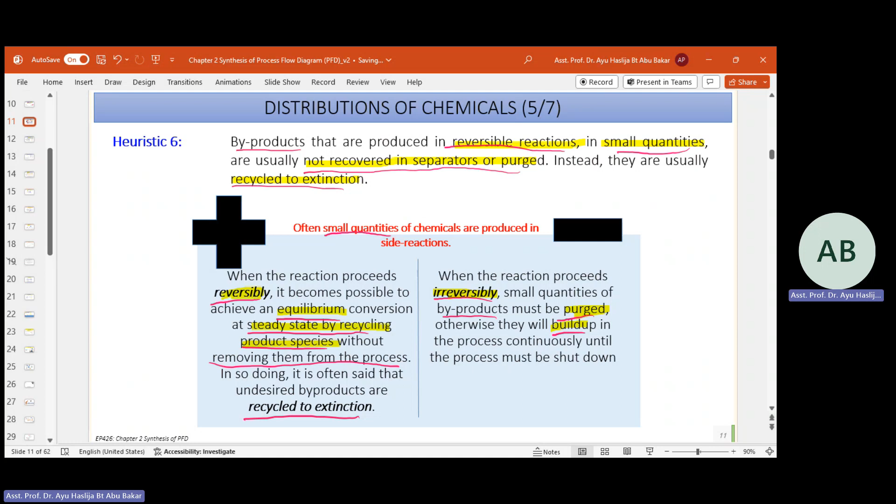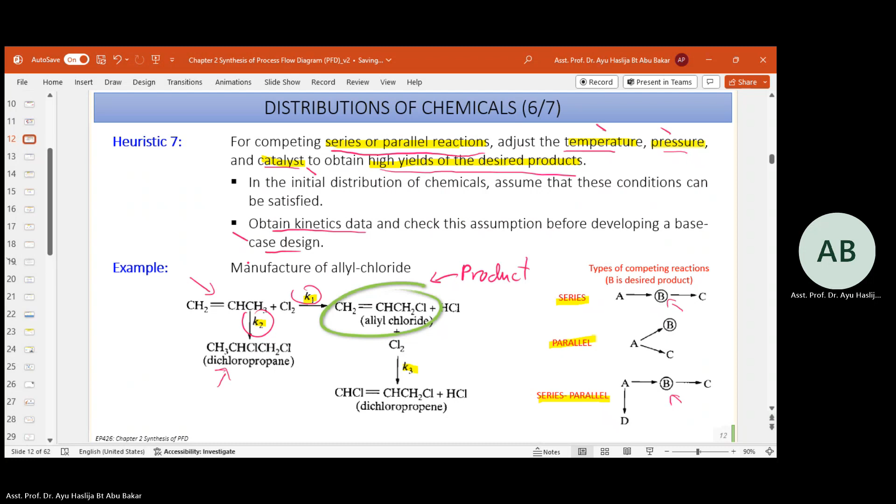Now here is the information that you require for the reaction. You see over here the constants. Reactions 1, 2, 3. This is your main product. K1, reaction 1. Reaction 1, reaction 2, reaction 3. In order to proceed directly to your product, these are the values that you require: reaction 1, the K value, and then the temperature, pressure, and different kinds of data.

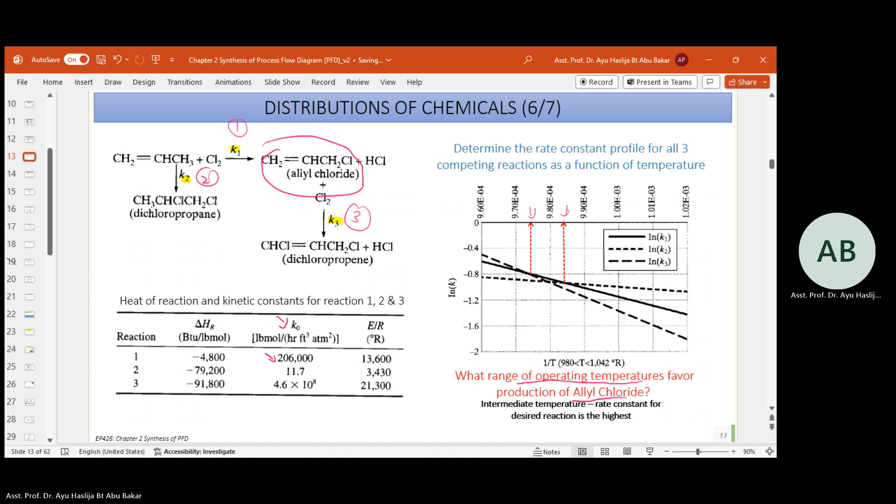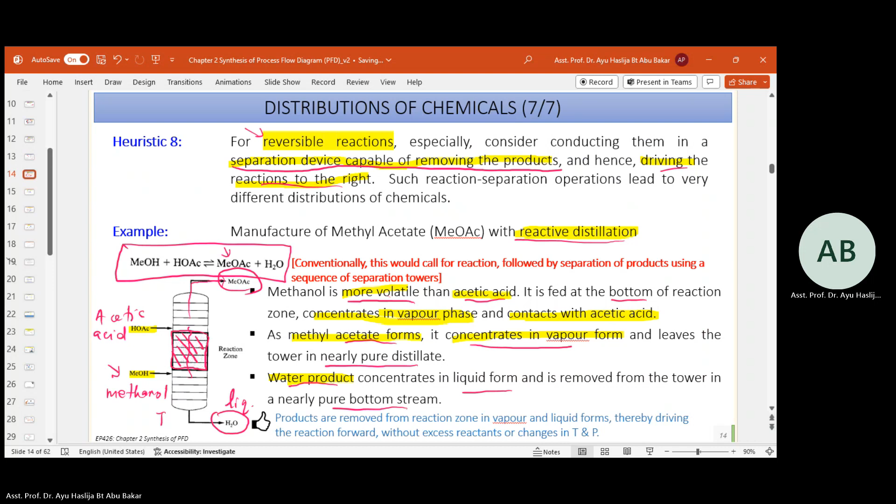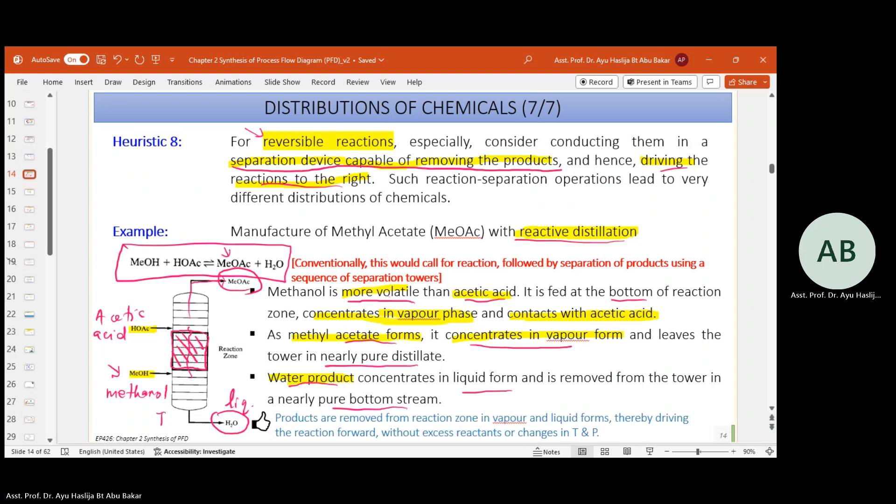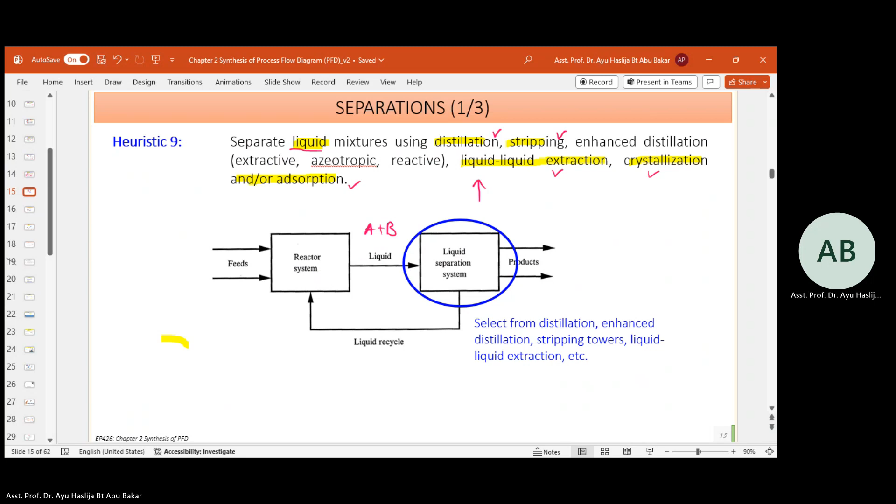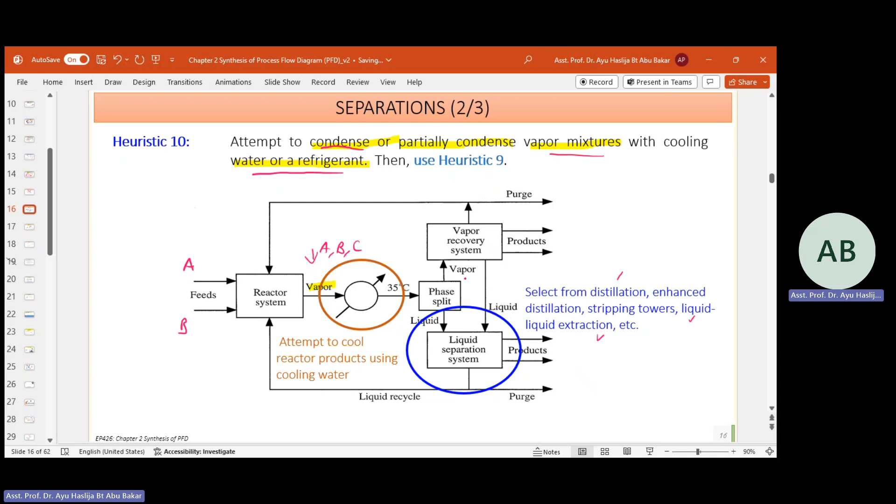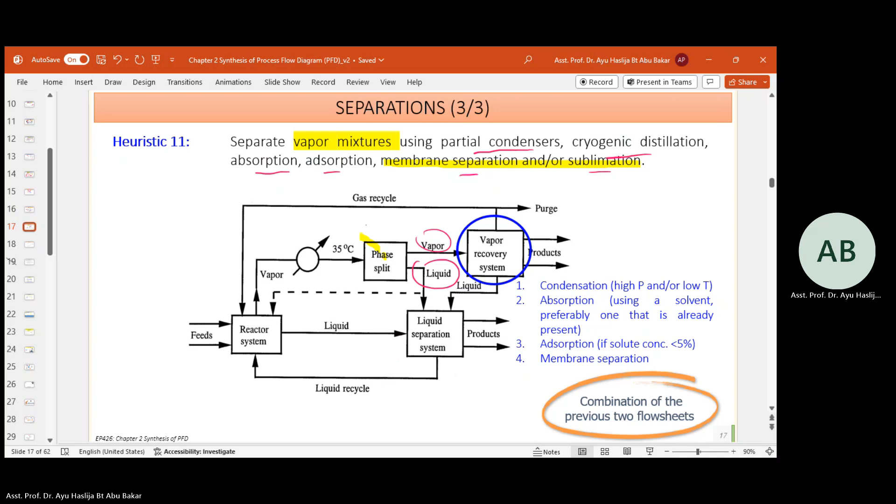Okay. Any question on the separation? Clear? Now, this is the summary of the separation heuristics: if the product stream is liquid, when it is vapor, and vapor-liquid.

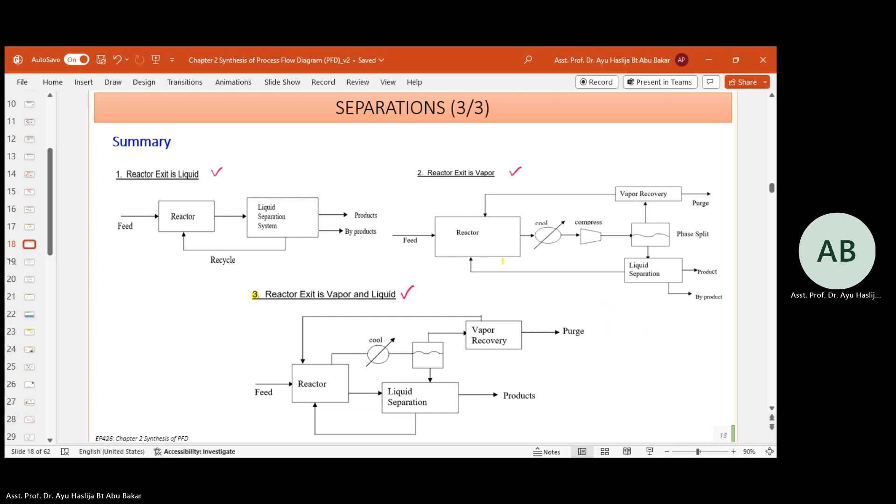Now I move this slide because it's all summarized in slides 20 and 21. Okay, now heat transfer. We move to heat transfer. Heat transfer has two categories, exothermic and endothermic. Okay, what should you do when you have a highly exothermic reaction? When you have a highly exothermic heat of reaction, consider the use of excess of reactant.

Okay. One, excess of reactant, inert diluent, or cold shots. And/or, which one method to implement in your process plant. Okay. Now, excess of reactant we had done previously on the raw material, where it also applies when you have feed with toxic and hazardous material, so that it completely reacts with the toxic and hazardous material. So apart from that function, it can also absorb the heat of reaction.

Okay, excess of reactant. Then inert diluent, again, supply inert to control the heat of reaction. Okay, and also cold shot. Cold shot over here, you cannot simply reduce straight away from high temperature to very low temperature. Okay, you must do it in steps. You see they are separated into a few steps. Cold shot, separated into a few phases until you get your targeted temperature.

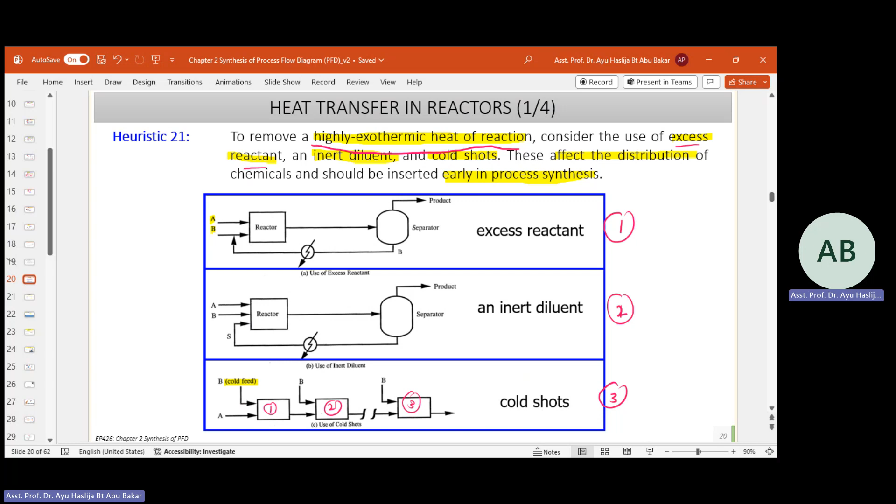Now for less exothermic, you can circulate the reactor fluid to an external cooler or use a jacketed vessel or cooling coils. Okay, less exothermic, so you can opt for less cost of controlling the heat. And you can also consider the use of intercoolers between adiabatic reaction stages. Okay, intercoolers.

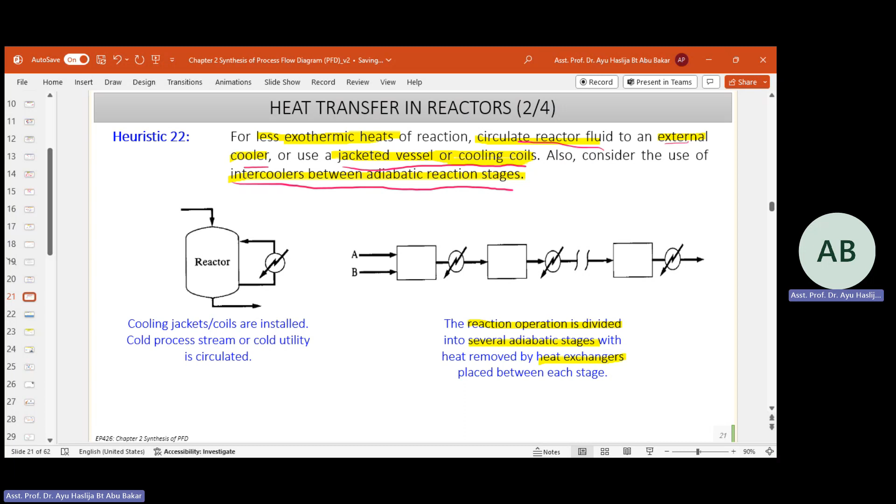Now for endothermic, similar concept, but endothermic, high temperature or low temperature? Endo. If highly exothermic, it releases heat, right? High temperature. Highly endothermic absorbs heat. How about the temperature? Low temperature. Yes, low temperature. Okay, so to control temperature for highly endothermic heat of reaction, meaning that the temperature is very low,

consider again the use of reactants. Similar practice. Excess of reactant, inert diluent, and hot shots. Now hot shots to control the temperature. What happens if you don't control the highly endothermic reaction?

What is possible to occur if you don't control the temperature? It goes too low, the reaction stops. Sure. Possible. Other than that, yes, cryogenic. If it freezes, perhaps you can freeze the unit op. You can freeze the nearby unit op, perhaps. This affects the distribution of the chemicals. So your feed may freeze as well. Then it can stop the reaction once your feed freezes. Okay.

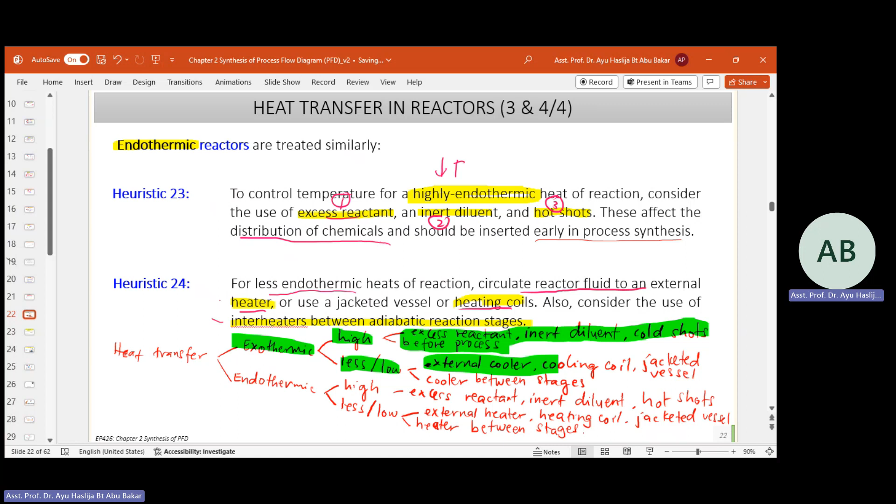Categorized into endothermic and exothermic. When you have exothermic, the heat will go high, or less or low. So what happens when you have high? Again, excess reactant, inert diluent, cold shots before the process. If you have less or low, external cooler, cooling coil, jacketed, and cooler between stages. Okay, if you have endo, similar for high. Excess reactant, inert diluent, and hot shots. Less and low, heater.

Come again? Case by case. If you need all those three to control the temperature, yes, you can do that. It depends. If required. But usually you will see which one is more feasible, because all of them involve cost. If either two or one can control the temperature and the reaction, then just proceed with those.

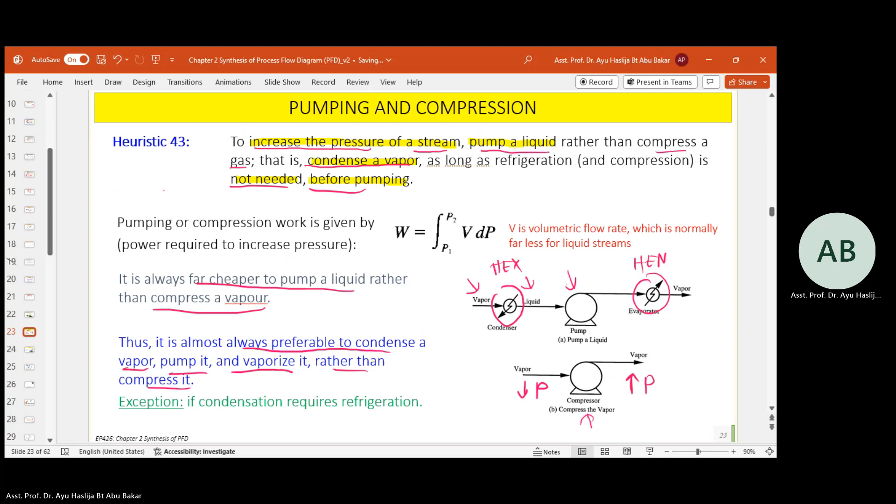In PDP, students sometimes use a pump to increase the pressure of a vapor stream. So you must use the correct instrument to increase the pressure of your stream. Check the phase of your stream. Liquid, use a pump. Gas, use a compressor. That's the fundamental. Cannot.

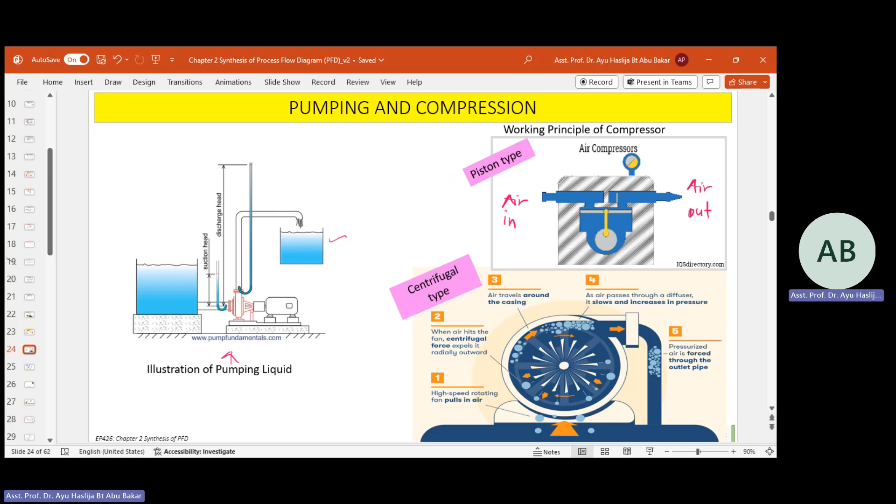This is the summary of the heuristics. We have 5 categories: the raw chemicals, the chemical reactions, distribution of the chemicals, the input and output, the recycle system, the separation. Then the heat transfer, exo or endo, whether you need cold shots or hot shots. Then the last part is the pump and compressor.

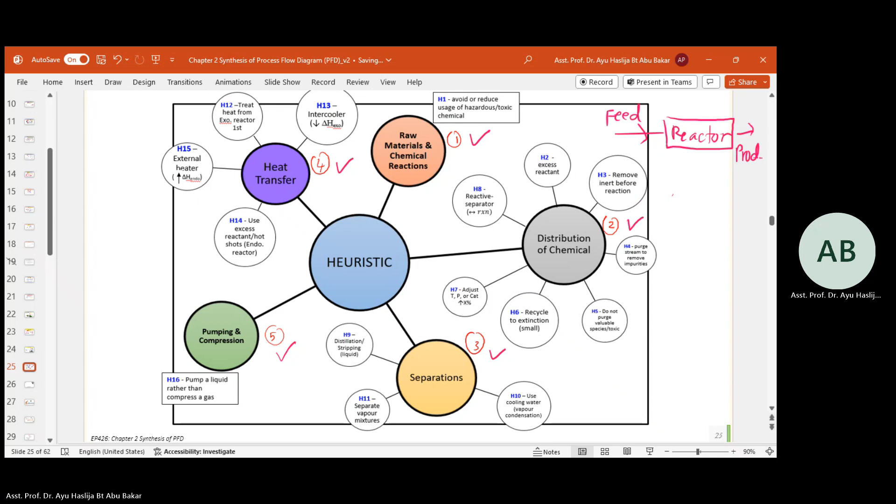These two, 1 and 2, basically involve your reactor, the feed for your reactor. Wait, I'll draw it. What I can conclude is number 1 and number 2, the raw materials and chemical reactions, basically involve your reactor: the feed and the product. The feed depends on your raw materials. Inside the reactor, the reaction occurs. How is the reaction? So both 1 and 2 refer to the first part of a process, involving the reactor and reaction.

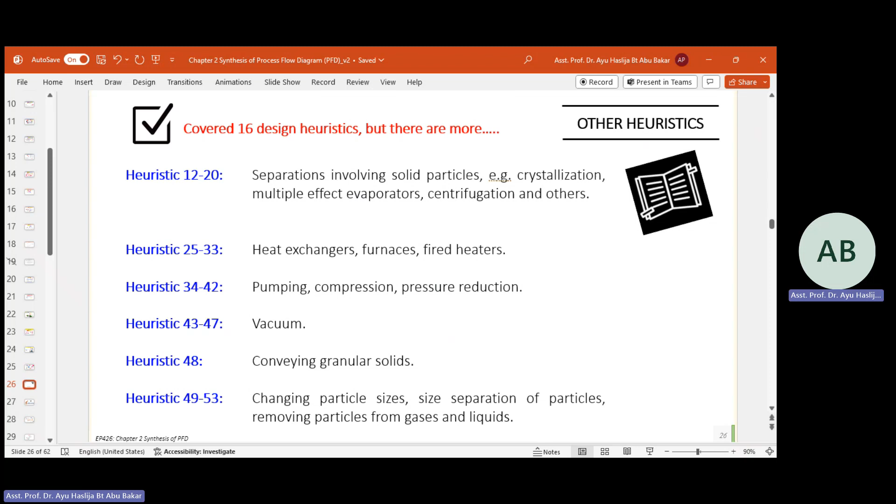After you get your product, then you need to think of how to distribute, to separate it. After you finalize all those things, only then does step 5 come in, task integration: you connect each of the unit operations into one complete link. Any questions so far? Those are the important heuristics you should focus on. There are many more heuristics, but those are the most important ones, the ones we discussed.

Okay. Can. Now we move to steps in designing a chemical process. Do you want a 5 minute break? Okay, we take 5. Those who haven't captured the attendance, snap.

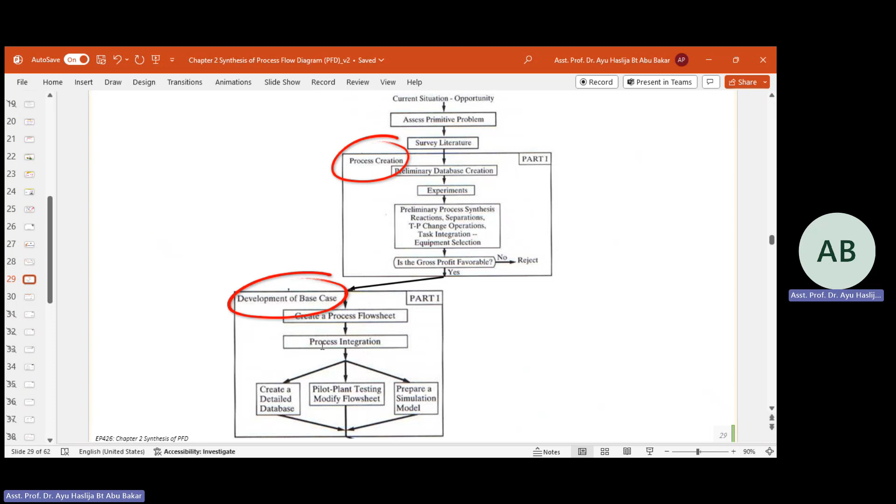Now, we are done with the heuristics. We move forward into steps in designing the chemical process. Okay, I will use an example of the VCM. This one you can read through all the recall slides. Okay, I will skip to here. This one, as discussed earlier, these are the process synthesis. Process synthesis, the 5 steps. Last one, after the heuristics, the heat exchanger, everything, and the pump and compressor, then only integrate everything into one PFD.

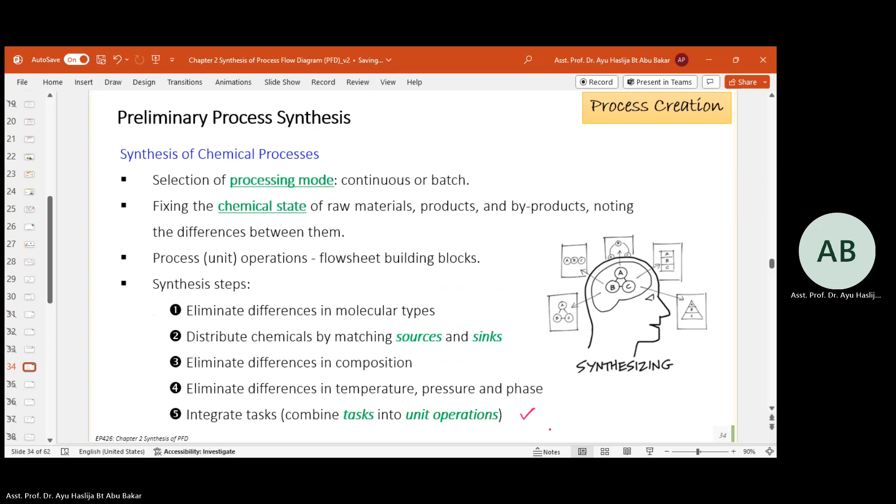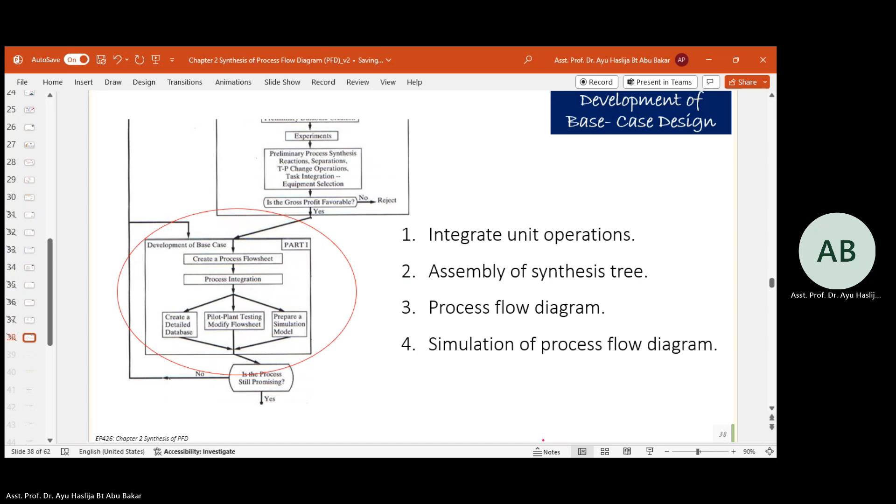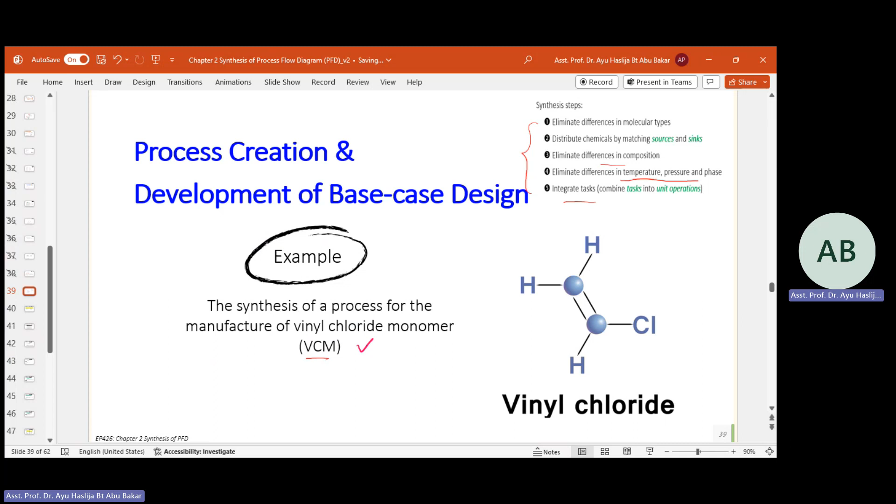This one is a repetition from the previous part. Okay, I'll skip to this. Process creation and development of base case design. So we will use the example of VCM. Again, the VCM, the one that we discussed, the alternative synthesis last time. Now we go one by one, the steps.

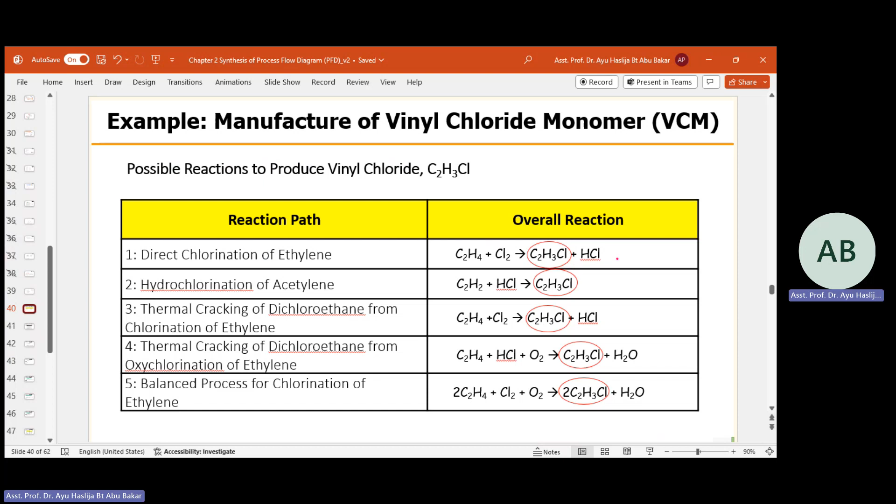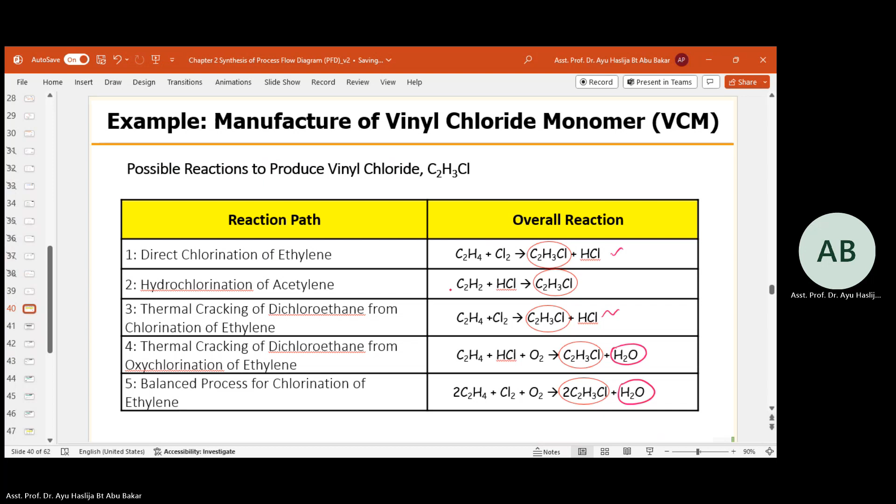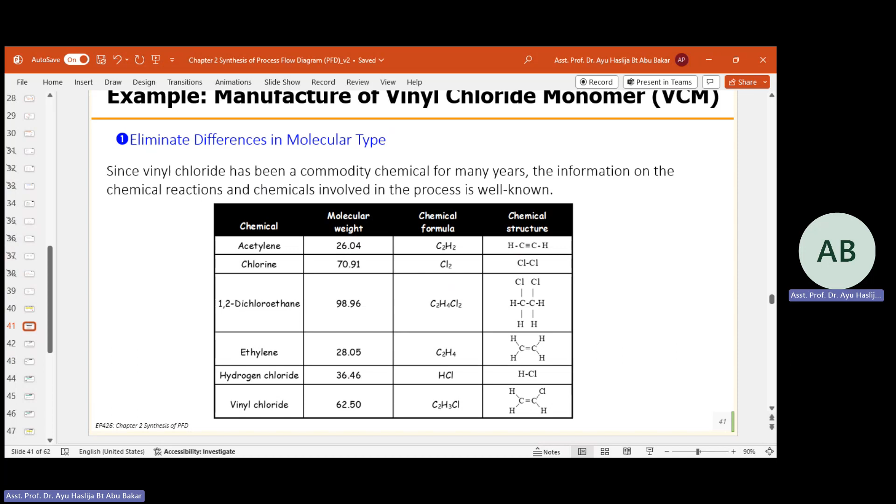Now the first step is to eliminate the differences in the molecular type. From the 5 alternative pathways, you should compare the properties. Here you see this is your main product, the VCM. In some of the reactions, you have byproducts, which are HCl and water. Your feed, you either need C2H4 or C2H2. So you should compare all of these properties, list them down in a table. Finalize the properties, like the molecular weight. Why? Because that will be used in your reaction.

Okay, we go one by one. Step 1, to eliminate differences. First, we compare the advantages and disadvantages for each pathway. Select this one, reaction 1. See what the advantages are. It can occur spontaneously at a few hundred degrees C, meaning that the reaction rate is fast to get your product. The disadvantages: it does not give a high yield of VC without simultaneously producing large amounts of byproduct, expensive chlorine, and may produce byproducts which may not be sold easily.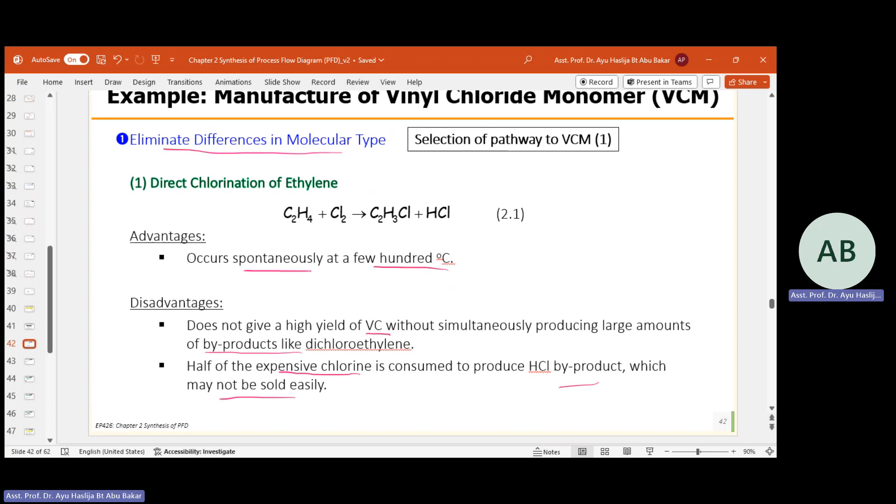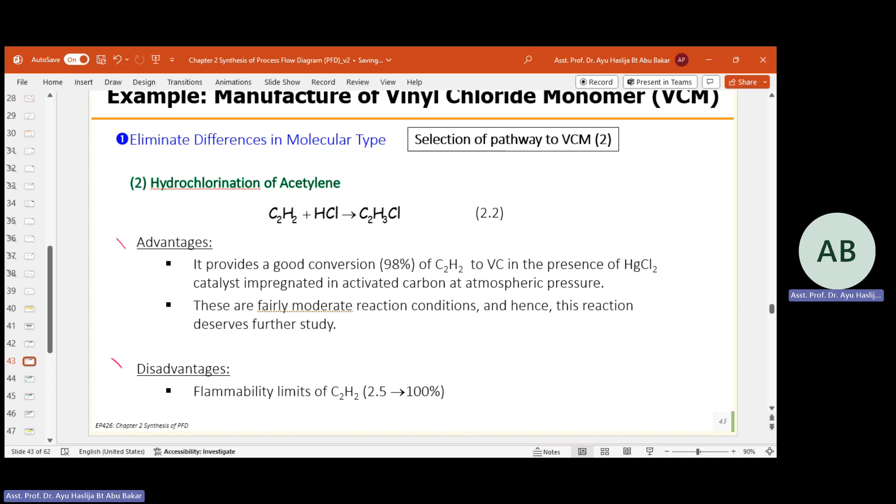So for each of the pathways, you must list down the advantages and disadvantages. In your PDP, I think it is better for you to put it in a table. Then you rate it. From there, you can see the ranking, which one to choose. Next pathway, which is hydrochlorination of acetylene. You list down again the advantages and disadvantages. Do the same for each pathway. Okay, that one is for step 1.

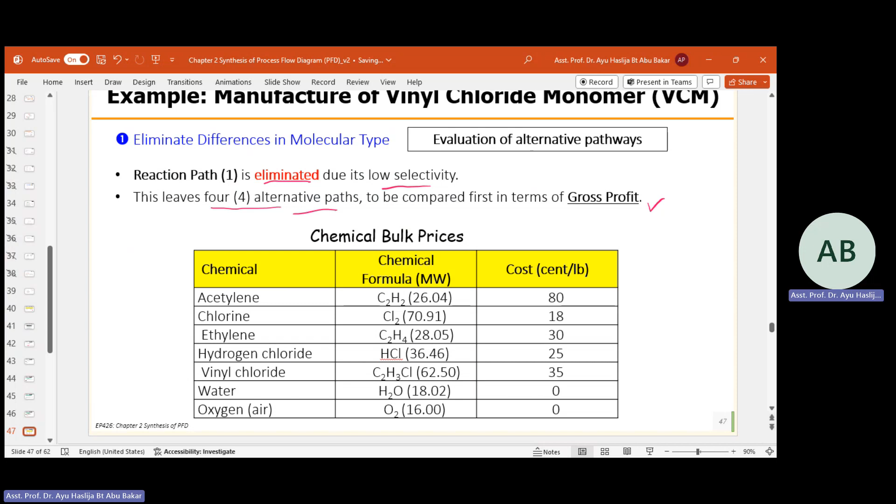Then you should compare the gross profit. This is only gross profit, not economic analysis yet. Gross profit here, you compare your product minus your reactant, minus your feed, whatever you need. The simplest analysis, gross profit. That's why the information just now, the chemical formula, everything, is important so that you can know the cost per kg or per ton. It depends on what basis you want to compare.

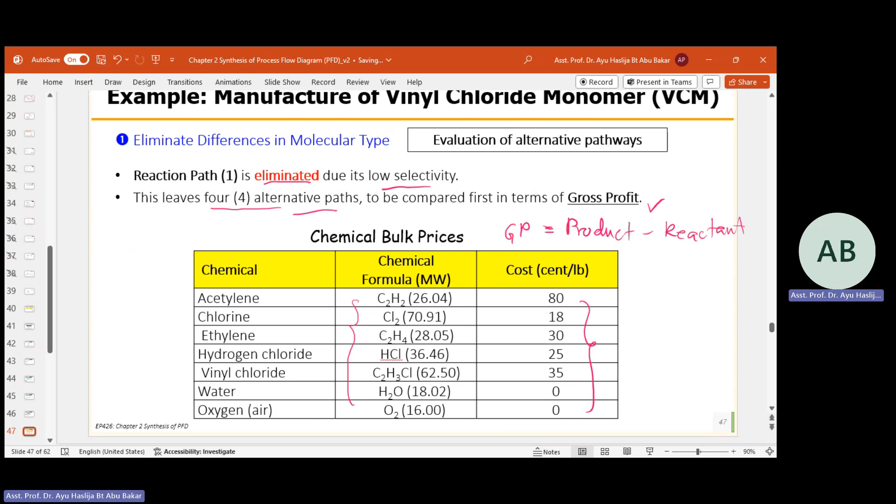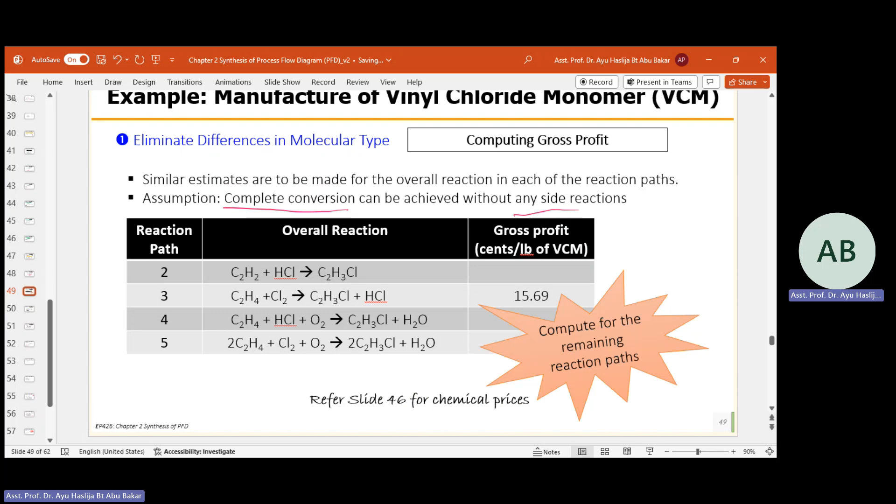Now here it considers reaction path number 3, this is the product and reactant. Compare the cost, product minus the reactant. You get positive, so roughly there is still profit. This one, path 3, has profit. Now again, estimate for the rest. Assumption: complete conversion, without any side reaction, just to roughly calculate the gross profit.

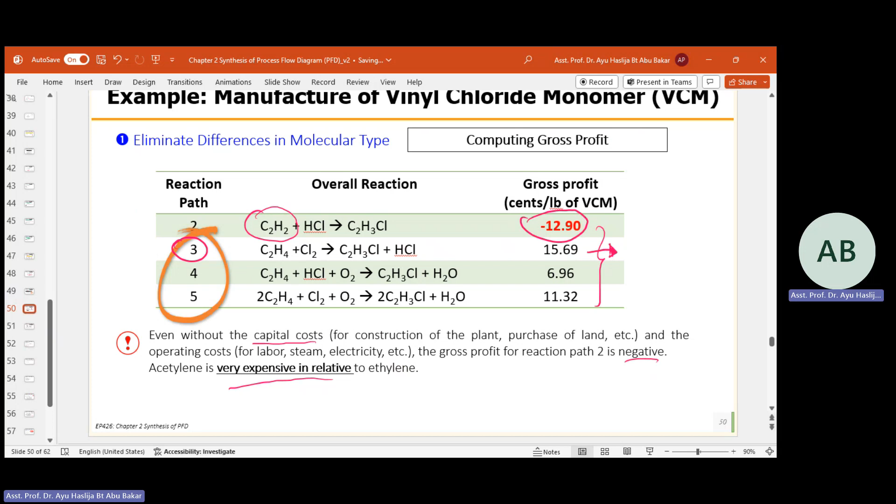Here it chose reaction 3 because from the gross profit comparison, it gives higher gross profit. Okay, so we will focus on reaction 3 because it gives higher gross profit. Now we proceed with reaction 3, then we check for the rest.

So for reaction 3, this is the feed, this is the product. Okay. Identify the feed and the product. So eliminate differences, still at the first stage. First step, identify what are the feed and the products, what is the targeted production. Okay.

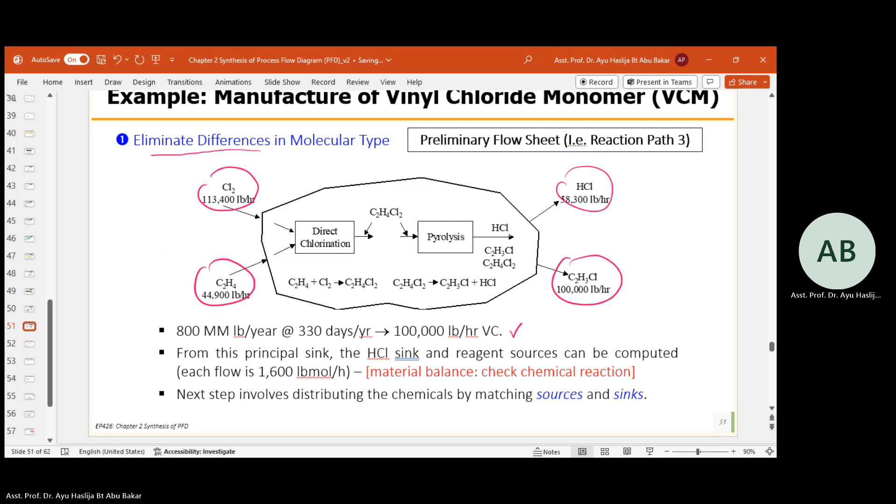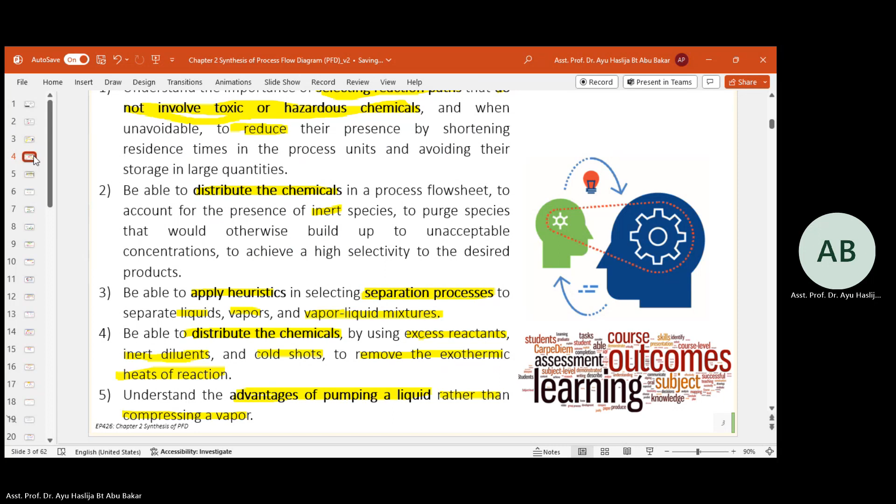Now from there, distribute the chemicals. Okay, wait, before we go to distribute. For eliminate differences, still remember what is the heuristic. Eliminate differences. Okay, we check back what are the heuristics. Here, raw materials and chemical reaction. Only one heuristic, which you should select the raw materials and chemical reaction to avoid and reduce all of this.

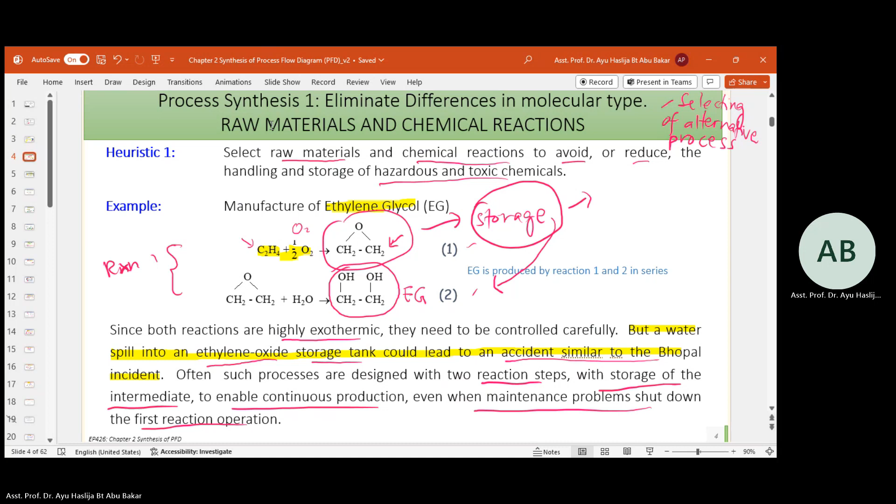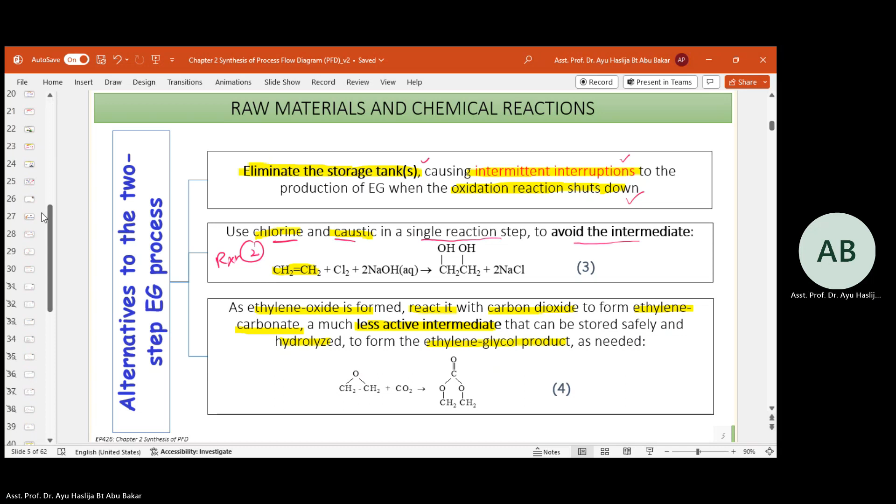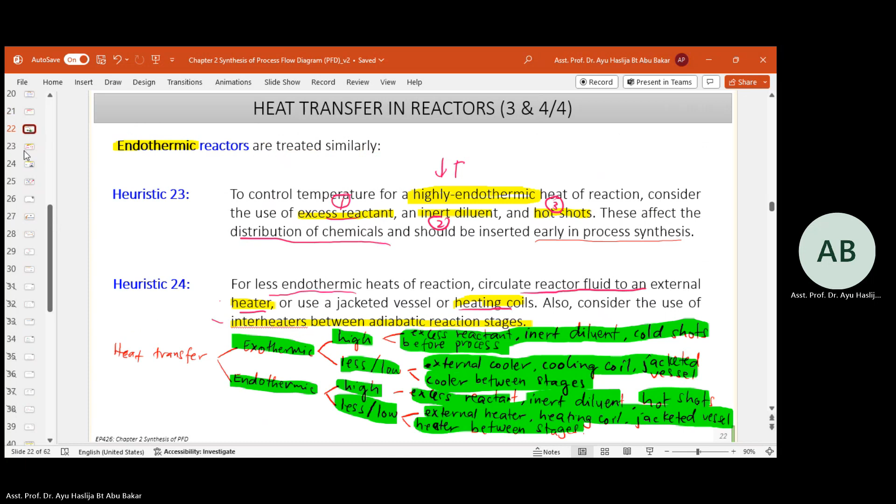Okay, so this one, we had done the comparison. Which one is better? For step 1, only one heuristic. Wait, I open the summary. Okay, this one. Heuristic. Step 1, only one heuristic. Then we move to step 2, distribution of the chemicals. So let's see whether it meets any of these heuristics. We can apply any of these heuristics. Okay.

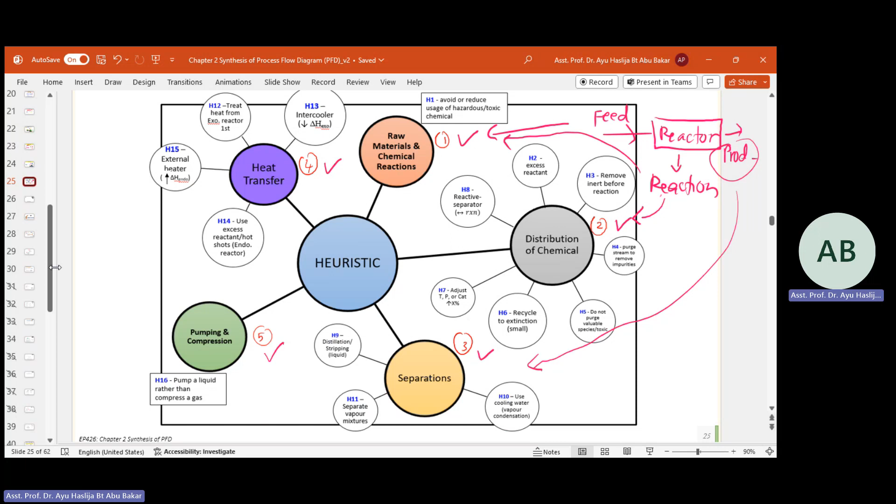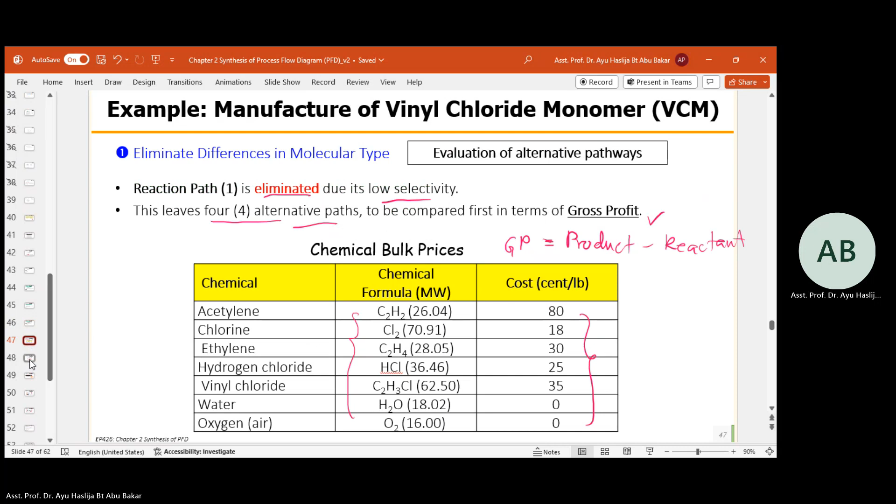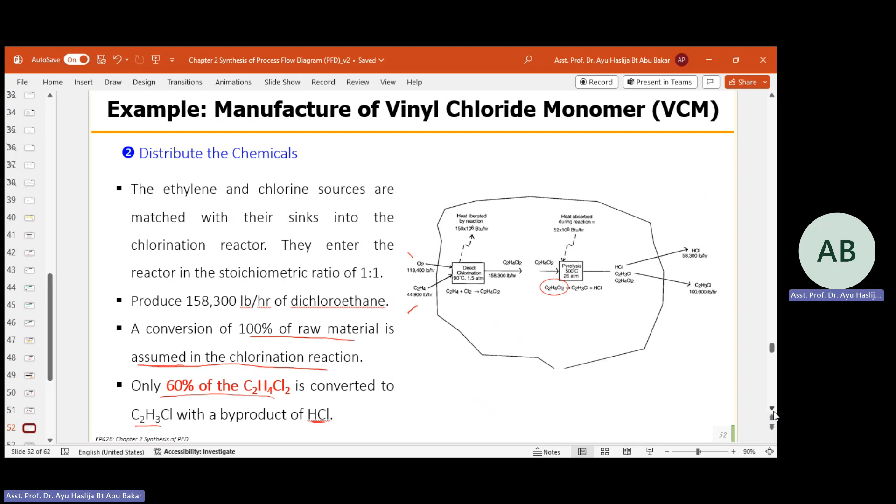Okay, now we go for distribute the chemicals. Few points need to be taken into consideration. We identify chlorine and ethylene as the feed. Okay, what is the production rate that you need to identify? What is the conversion? So at the moment, at the first stage, you assume 100% conversion. Okay, but after you simulate, only 60% of the C2H4Cl2 is converted.

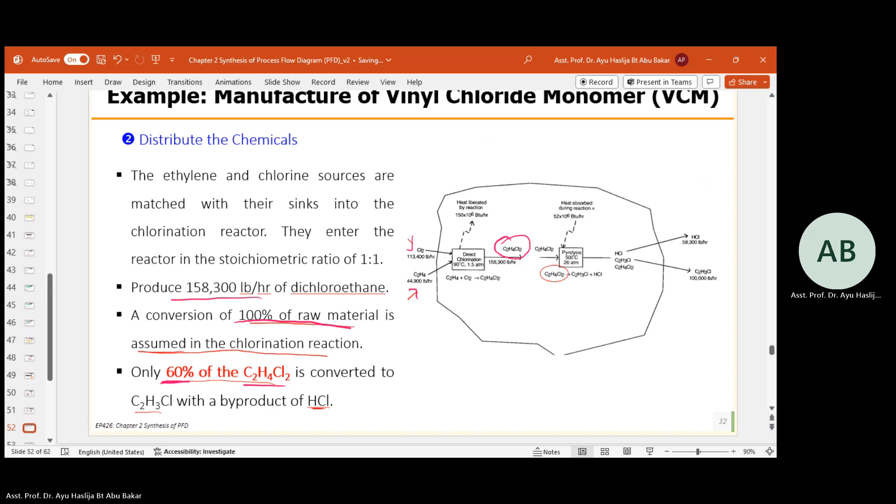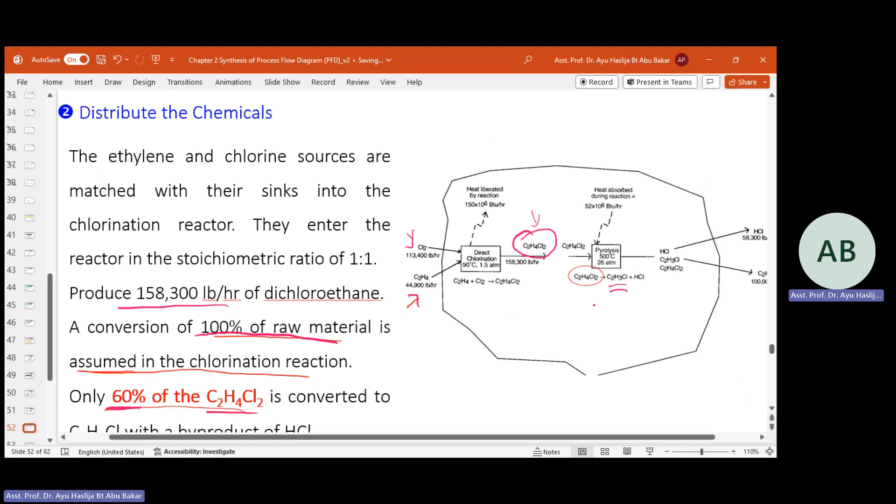Yeah, feed Cl2 reacts with ethene, enters the direct chlorination process, then you produce this. Okay, this is not yet your main product. Then it goes to pyrolysis to produce the VCM. Okay, so from there, you can try to calculate through material balance how much is your product. What is the conversion rate of your product from there?

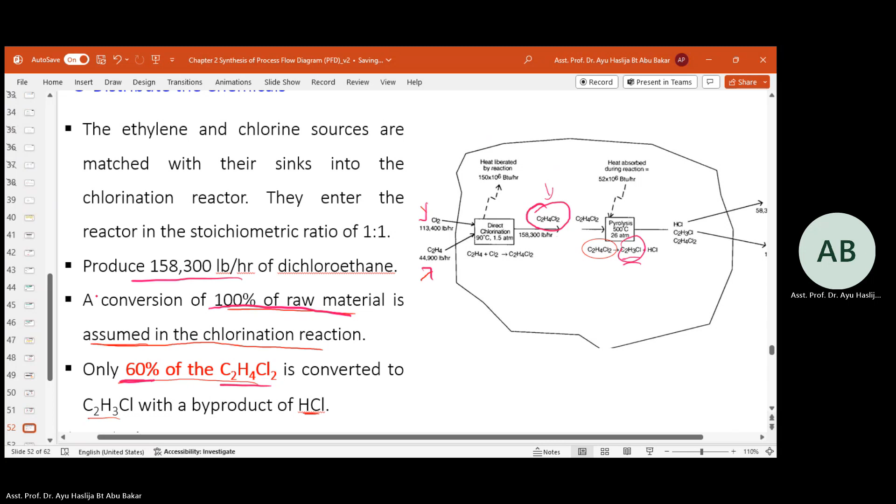Okay, from the material balance, then you should calculate your targeted production. How many tons per day or per year? Okay, you should calculate based on your material balance. Okay, step 2, you need to identify what are the reactions involved between these two stages and what happened, the material balance, how many percent of conversion, what are the yields. Okay, that's the one for step 2.

Now we move to step 3, eliminate differences in composition. So after your chlorination reaction, it is nearly pure and requires no purification. Okay, here after chlorination, nearly pure, you get C2H4Cl2, dichloroethane. Now this one is fed into the pyrolysis to produce your VCM. So after the chlorination process, it requires no purification.

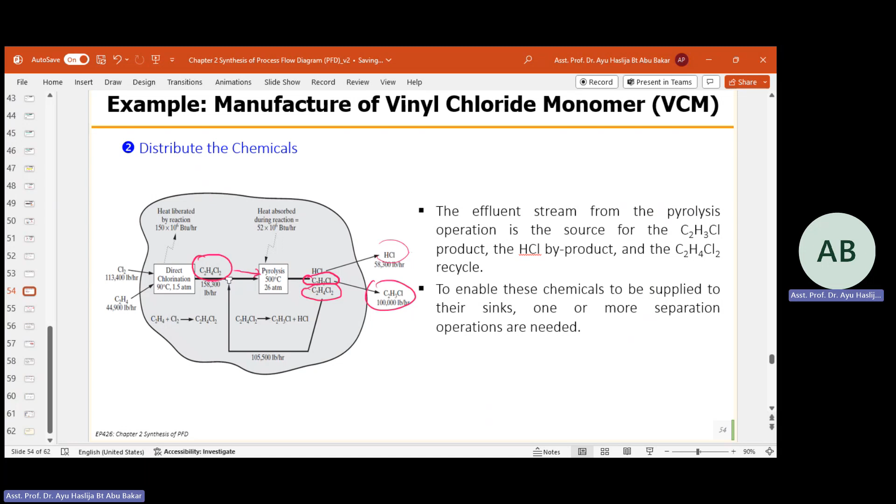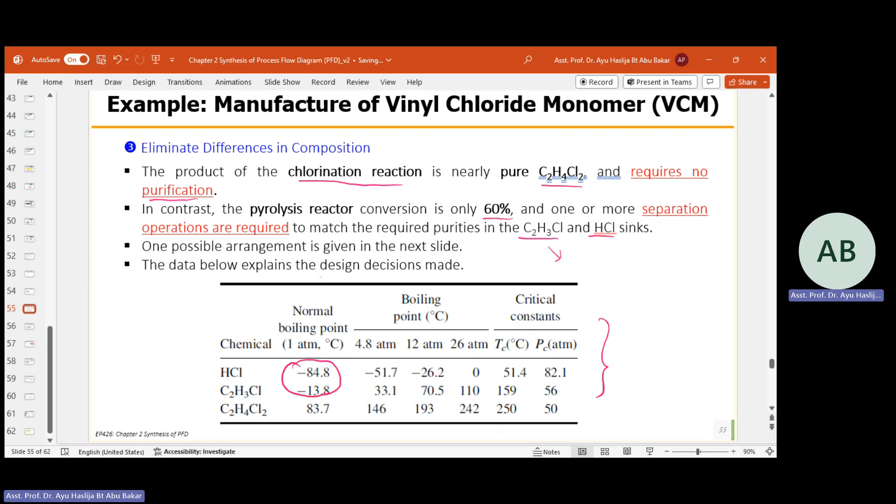Okay, then it's suggested distillation column. Two distillation columns to separate the VCM and the HCl. Remember that product from pyrolysis is in vapor form. So do you need to liquefy the vapor to enter the distillation column or not? You need to think. The feed to distillation, should it be liquid or can it be vapor? Liquid. Should be in liquid.

Then you should propose or look through the required instrument or unit op to install before the distillation column. Then from there, identify what type of distillation column can separate the HCl. Then the choice of distillation tower for the next one. What are the options that you have? Step 3 just now, eliminate differences, means the separation part. It involves the separation.

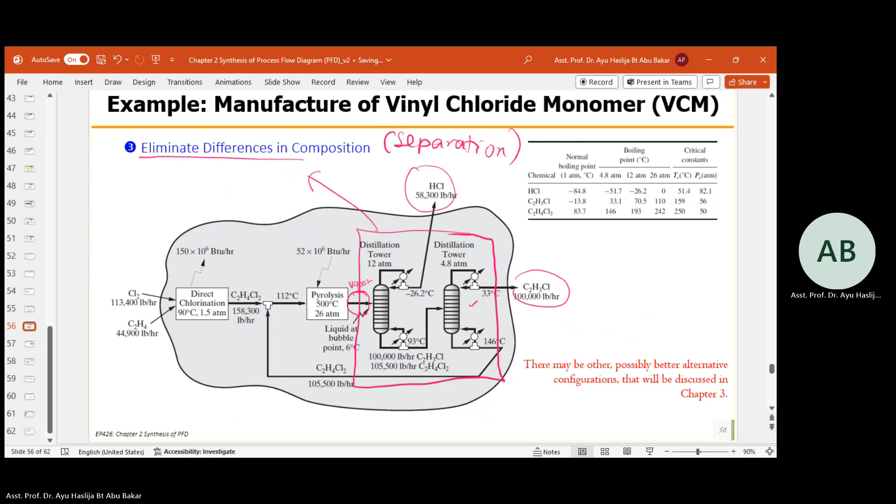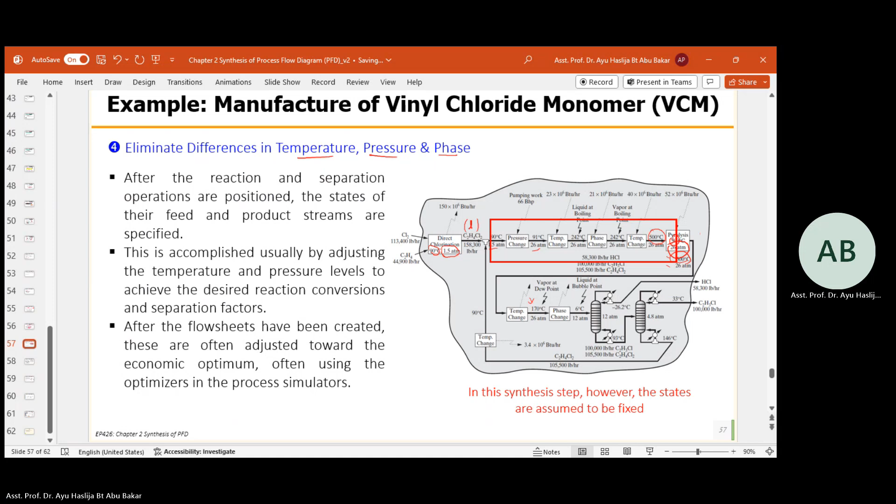Okay, step 4, which is to eliminate differences in temperature, pressure, and phase. Now you see the PFD becomes more complex, where you need to consider the temperature, pressure, and phase change. What are the units of instrument that you need to fulfill the requirement?

Okay, so the product stream over here, it mentioned 90 degrees. To enter the pyrolysis, you need up to 500 degrees C. So what do you need along the way before the pyrolysis?

Now here you see, after the pyrolysis, just now you mentioned in vapor form, right? So here now it identifies to change the temperature and phase. Okay, that is step 4: eliminate differences in temperature, pressure, and phase. Any stream that requires temperature change, pressure change, or phase change, you need to identify.

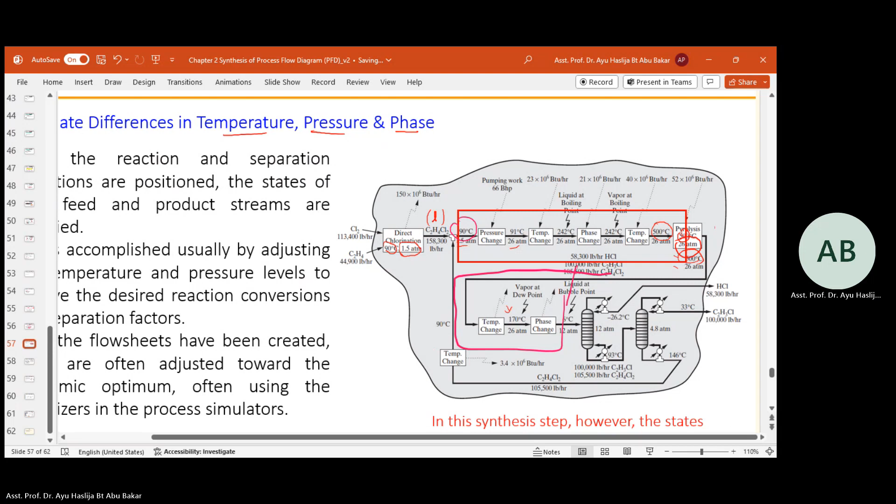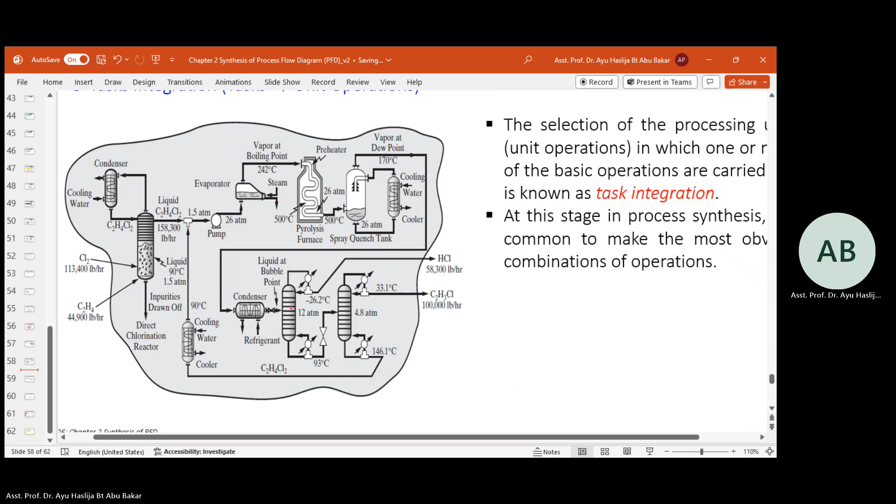Okay, so after you identify all the unit ops, the tasks, connect them all together in one process flow diagram. So from here, you can see the overall PFD. This is your input, this is the feed.

Okay, this is the feed product. This is your separation, step 3 just now. Okay, so this one, step 4, involves the evaporator, phase change, preheater.

This is your pyrolysis, one of the main units. Now, before entering the pyrolysis just now, you need to heat up the stream. So this is what you need.

After pyrolysis, the product stream, you need to change the phase. So this is what you need before it enters the distillation.

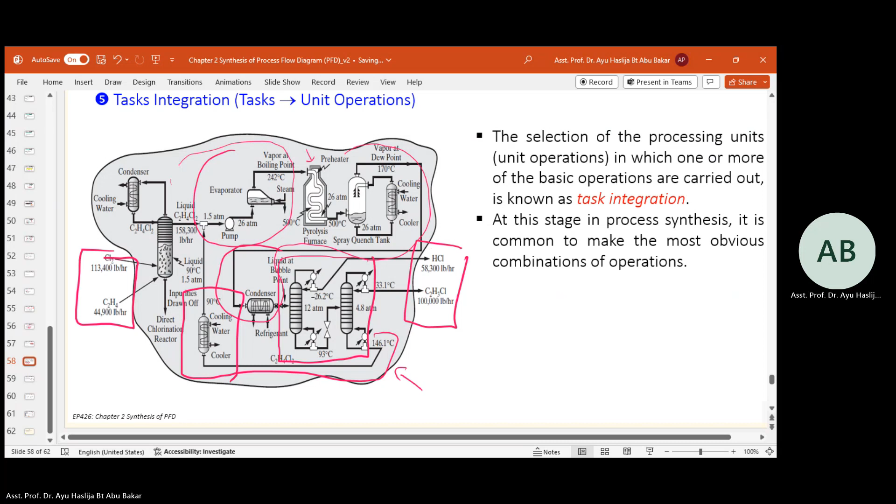Okay. Clear? Any question? This is the assembly of synthesis tree.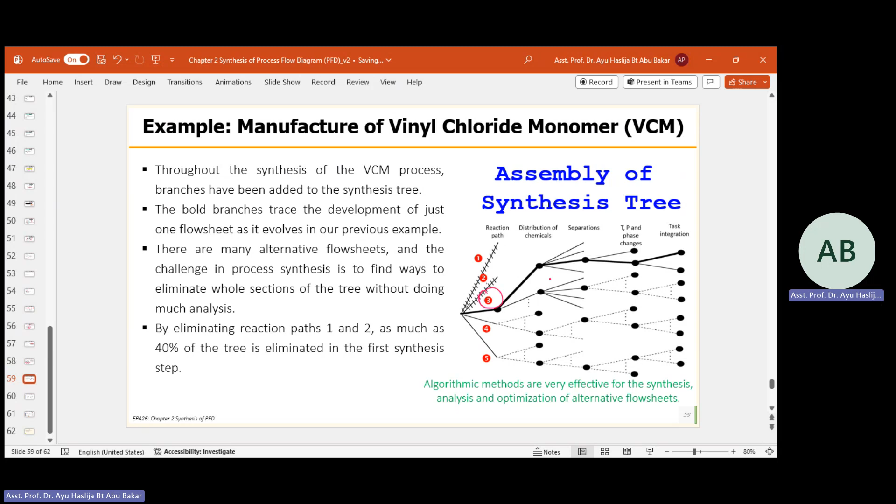Just to summarize the synthesis that you have done just now, where we choose the reaction path because of the high gross profit, then proceed from there. Okay.

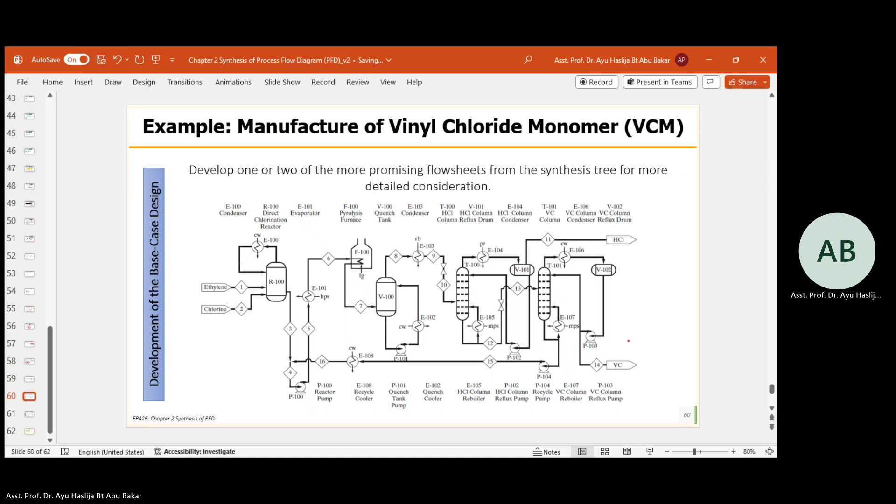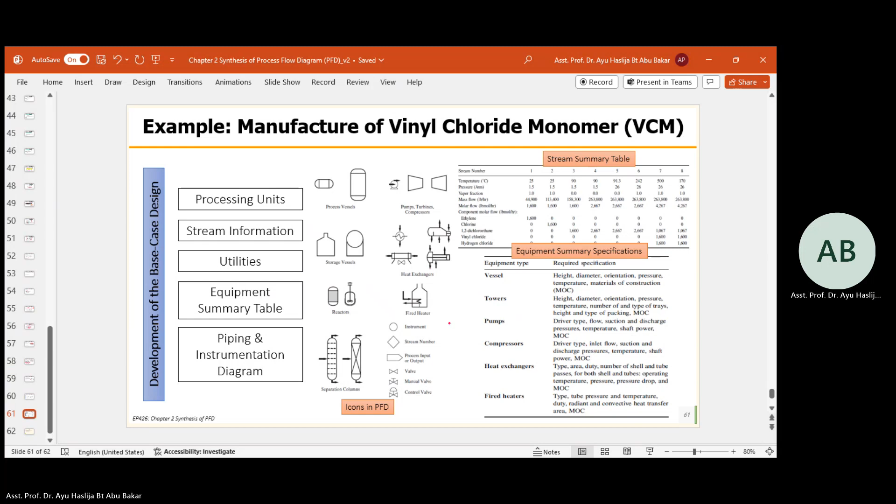This is more complex. This is the instrument and the equipment. Okay, you can read through the summary table.

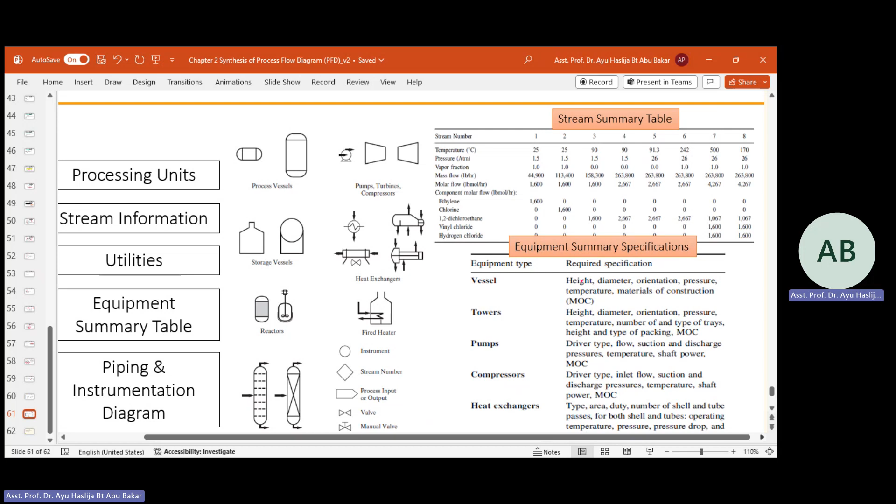Okay, your PFD should consist of this summary table, the stream summary table. This is important. So in the PFD, please include the stream summary table - each stream, what is in each stream, and what are the conditions: temperature, pressure, all those things, and what are the composition of your stream.

Usually the examiner will check each stream to see whether it tallies or not. Last time I evaluated at UTM, I'll share my experience: there were contradictions between the stream summary table and the PFD. Some examiners are very strict - they even calculate the amounts to check whether it's true or not. So please do not simply put any amount.

You must make sure it's all correct, the info is correct. And you should be able to justify and explain what happened if there's a phase change, temperature or pressure drop - you should be able to explain that. Okay, perhaps next class I can share with you their stream table summary.

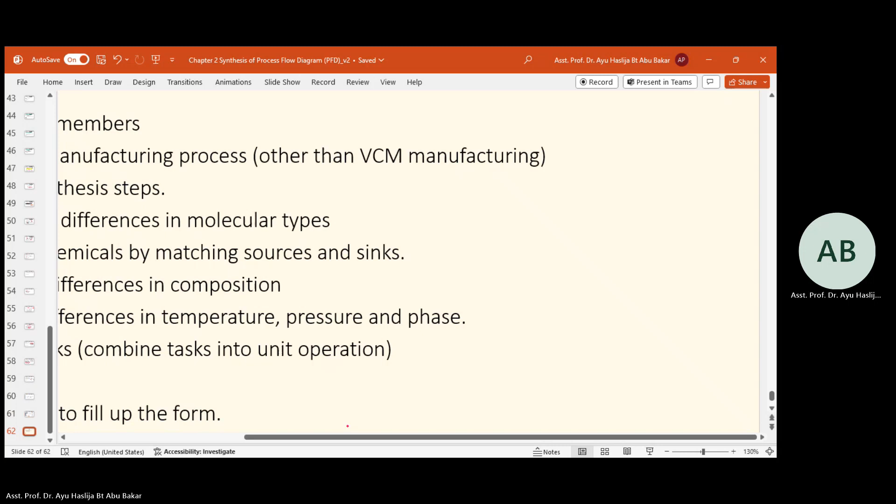Okay, so to make sure you understand this chapter 2, I want you to do one exercise, which is a group activity to implement the synthesis step. It is better to form a group and work in a group. Propose one product manufacturing process other than the VCM. You can use perhaps your PDP. Implement these 5 synthesis steps until you can generate the PFD.

Just a simple one, don't need to identify 5 major equipments or anything. Just a simple process - I want to see you implement these steps.